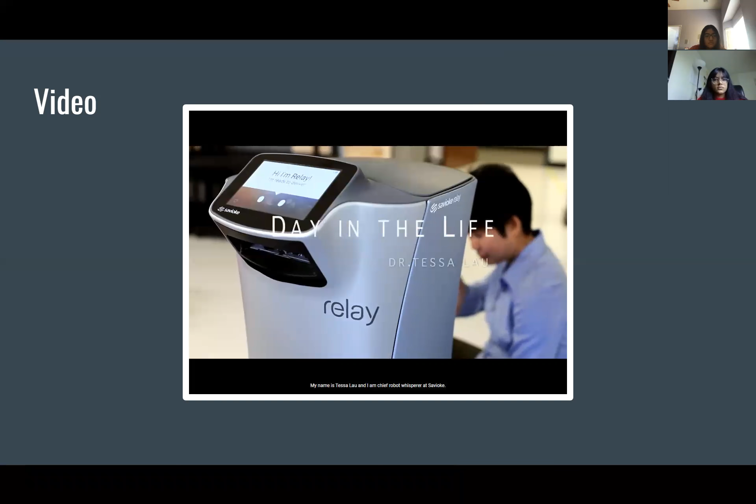My name is Tessa Lau. I am Chief Robot Whisperer at Savioke. Savioke is a robotics company, and we're building autonomous robot helpers for the services industry.

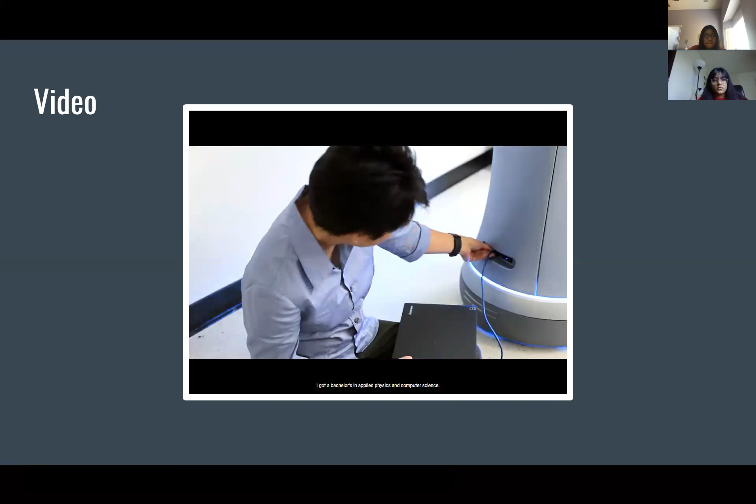I went to Cornell for my undergrad. I got a bachelor's in applied physics and computer science. I really liked physics because it was about hands-on doing experiments and building things and making stuff real. Computer science was also really interesting because you could create stuff a lot faster on a computer.

So I went into computer science for my graduate studies. I went to University of Washington, where I studied artificial intelligence and human-computer interaction.

I don't think of myself as a roboticist, even though that's what I do. The robot whispering for me is about making it so that the robots behave well in human environments. And it's not just about programming or engineering, it's about looking at those robots in context.

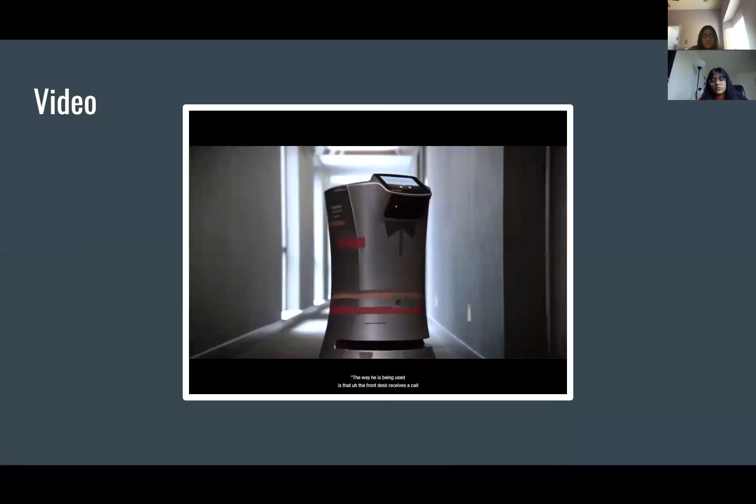The way it's being used is that the front desk receives a call from a guest room saying, I'd like to order a sandwich, or I forgot my toothbrush. So they grab the item that they want to deliver, load it into the robot, type in the room number, and the robot will go off to the room automatically.

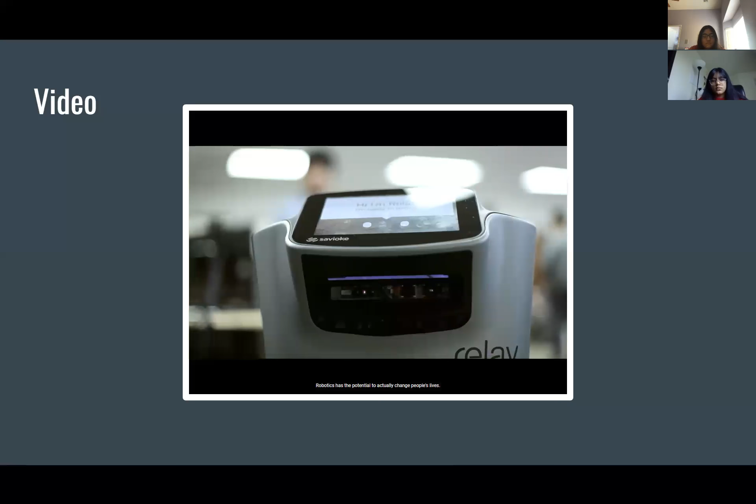Robotics has the potential to actually change people's lives in a much deeper, fundamental way than software could, because robots are physical. They can actually move around in your world and do things for you.

The robots that we were building, they can't replace a human because there's so much that a human can do that a robot can't. What they can do is the mundane stuff that no one wants to do anyway, like run stuff up to a hotel room and then come back down.

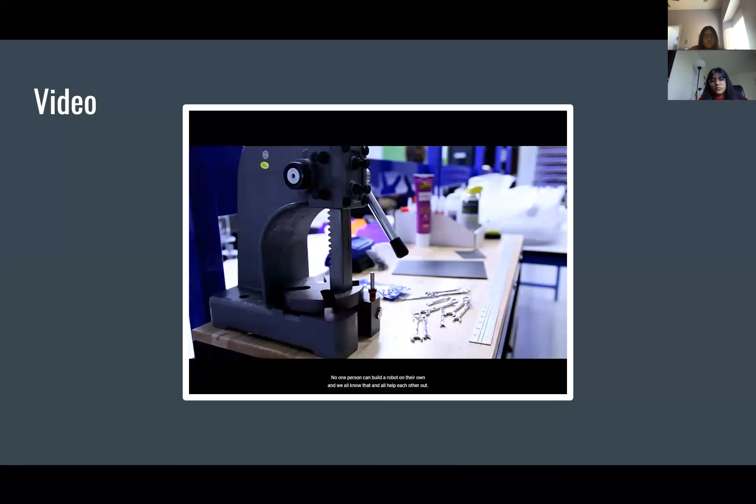No one person can build a robot on their own. And we all know that, and we all help each other out. I think one of the biggest skills that I bring to Savioke is soft leadership skills. I'm invested in making sure everyone's working together.

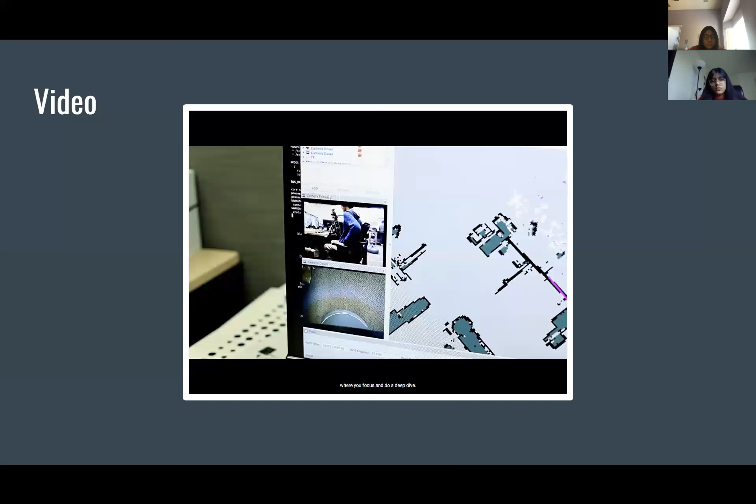I think it's really valuable to know a lot about a variety of things and then have a specialty within there where you focus and do a deep dive. I know computers, I know networking, I know physics, and that actually gives me knowledge about mechanical performance and just the basics of electrical engineering.

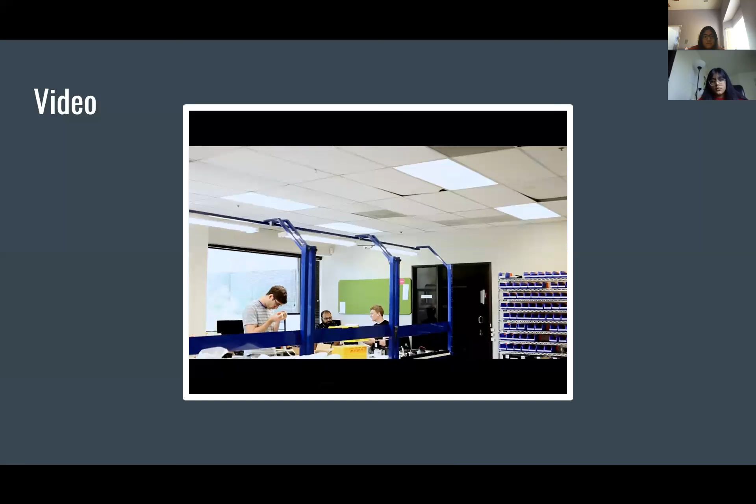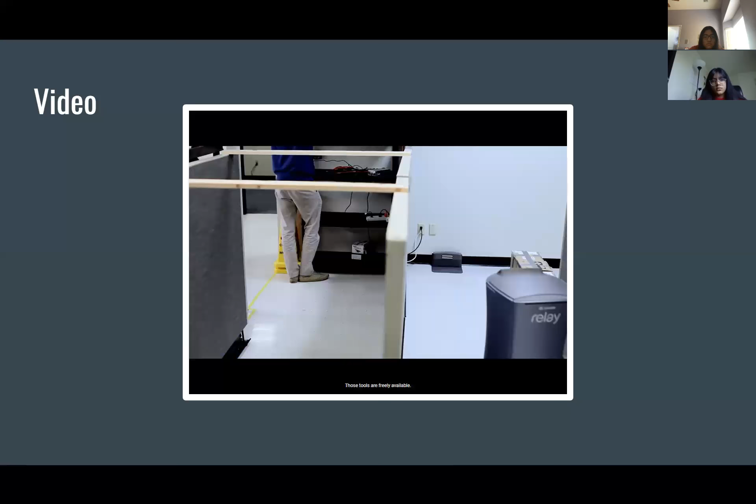I do a lot of integration testing, just making sure all of our software works properly on the physical hardware. We use GitHub a lot, which is an online collaboration tool for sharing source code and commenting on it. We're leveraging a lot of the contributions from the open source community. Those tools are freely available. Anyone can pick them up and learn how to use them.

My advice to women going into STEM fields is don't listen to anyone who says you can't do something. Definitely cultivate hobbies related to the field that you want to be in. I was lucky that my dad was into hobby computers, and so he brought one home. I would spend a lot of time just playing around with the computer and seeing what it could do.

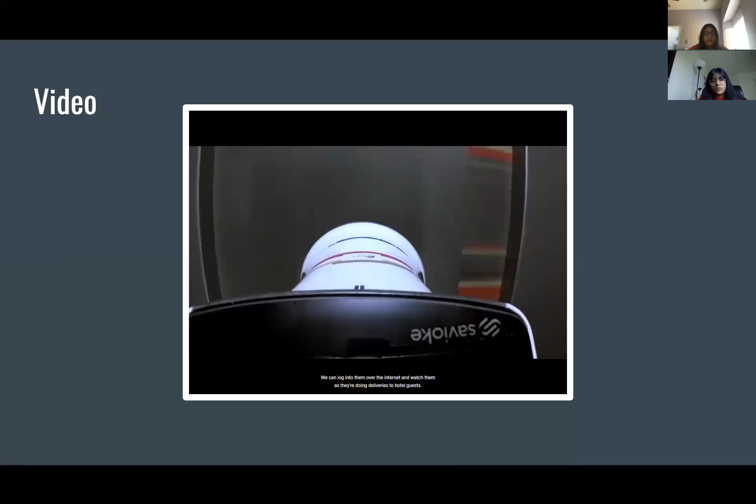We have those robots out in hotels right now. We can log into them over the internet and watch them as they're doing deliveries to hotel guests. Seeing the people interact with them and be delighted, all of those interactions are happening because of things that I built. And that's really incredible.

So like we mentioned before, this video showcases what a day at work is like for a robotics engineer. I think it also clears up a lot of misconceptions and fears about the rise of robotics. A lot of people are afraid that robots are gonna take all our jobs, but like the video mentions, they're designed to do repetitive tasks that no one would want to do anyway. They're all really mundane tasks that don't require human strength or labor.

So, what is robotics engineering? Robotics engineering is basically just a subfield of engineering that focuses on the design, construction, and programming of intelligent machines that are capable of performing different given tasks. These engineers often use aspects of machine learning and artificial intelligence to achieve this goal, and they design robots to make tasks safer and more efficient for humans.

This field of engineering is growing exponentially at the moment, and by 2030, robots are likely to replace as many as 36 million low-skilled jobs through the automation of simpler processes. There are some common examples of robots that are used today, including biomechatronic prosthetics, drones, and the Roomba vacuum.

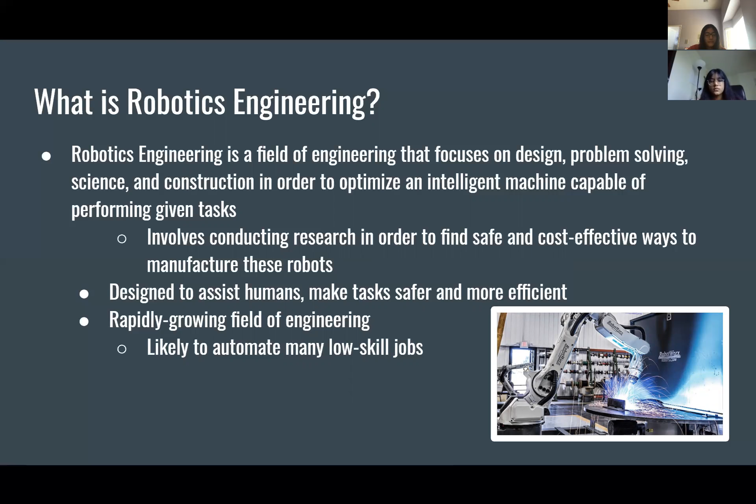So this is one of the examples of an experience level job opportunity that we found, and it is of a senior robotic process automation developer at CVS Health right here in Scottsdale. The salary for this experience level job is from 72K to 150K per year, and that's based here in Arizona.

For the education and degrees required, it requires about 8+ years of development experience, 3+ years of experience in RPA, a verifiable bachelor's degree, and a degree in computer science or a field that is related to computer science.

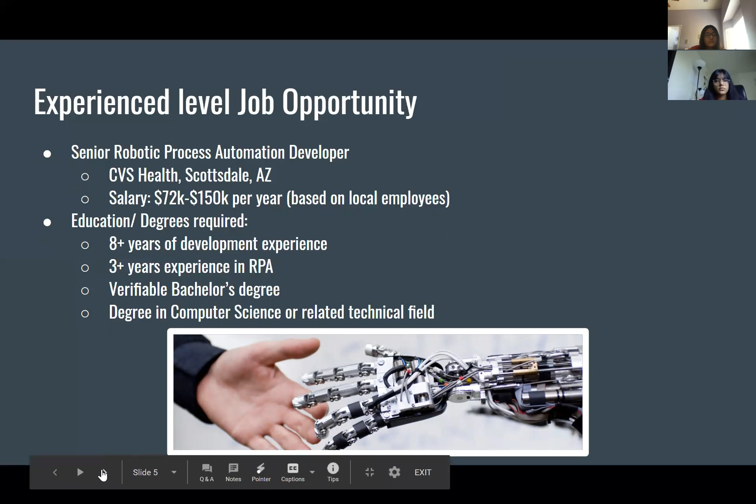So the experience level job opportunity requires more experience, which is why it obviously pays better than the entry level job opportunity. And the experience level job opportunity was actually looking for an RPA developer, which is a robotics process automation developer. And this job is very important in most engineering companies, which means that it's also one of the positions that is in demand the most.

An RPA developer designs, develops, and implements software robots. And again, this is just in Arizona where you have potential to make 150K per year. If you plan on going out of state to say California or maybe New York, there's potential that you could make a lot more than 150K. Also, really big companies like Google and NASA and iRobot are looking for RPA developers.

So what other types of companies need robotics engineers? The companies listed below are some of the possible applications of these types of robots. So for manufacturing plants, they can use robotic arms and arc-welding robots. For labs, they can use test tube sorters and mobile robots to transport lab specimens. For the medical field, they can use the Da Vinci robot for surgery and certain robotic nurses to make processes faster.

For the mining field, they can use autonomous mobile robots and robots that are used for excavation. For military, they can use drones and UAVs, and also they can use robots for sniper detection to protect their troops. For the automotive industry, they can use collaborative robots that are used in assembly lines, as well as light robot arms. For the life sciences field, they can use liquid handling robots or robots that could help in mass spectrometry and cell culture. And then for aerospace and engineering, they can use non-destructive testing and inspection robots, task robots for jobs such as drilling, and many more.

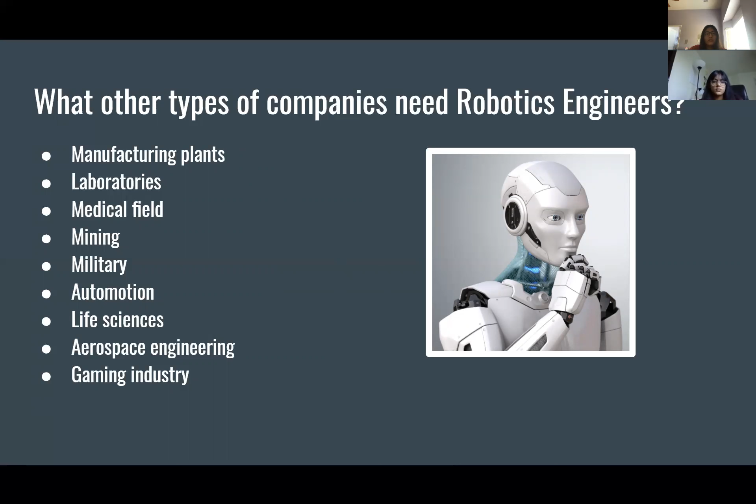Okay, so now let's talk about the growth rates and advantages of robotics engineering. So firstly, we have a statistic from the U.S. Bureau of Labor Statistics, and this basically says that from the years 2018 to 2028, the percent employment growth will increase by 4% for robotics engineering, which is a lot. And you can see below that there's a chart of the job growth in the US for robotics engineering.

But if you look to your left, it's a pie chart of all the robots and how they're in demand for the entire world. And you can see out of the 7 continents, Asia is one of the leading robot developers and implementers. So if you're interested in robotics engineering, the U.S. obviously has a lot of opportunities, but if you look at it from a global perspective, there's way more than you can imagine. So if you'd like to travel a lot, robotics engineering is probably a good pick for you.